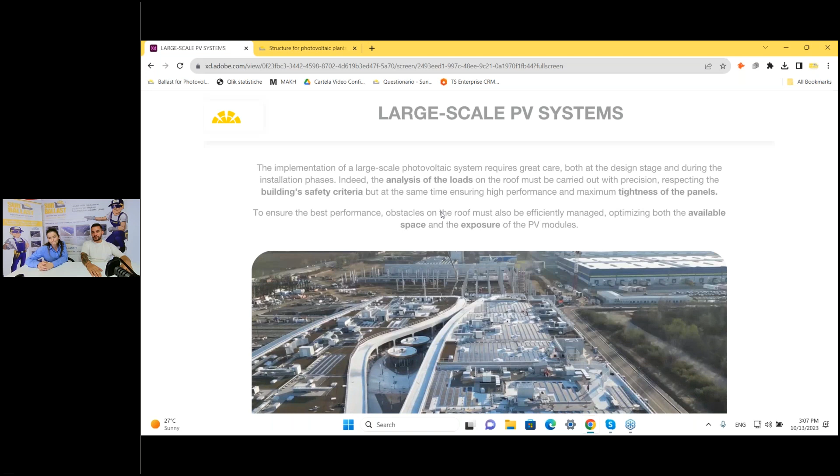Ilona here will explain the importance of installing with Sun Ballast on mainly industrial roofs. Sun Ballast is not only for small installations. Our structure is designed to cover all the industrial areas, right? It's flat roof, but you can use it on different typologies, different types of roofs, and surfaces as well.

As you all know, when we do a large scale PV system, it's very important to take care both in the design phase of the project and the installation phase. There are more experts in the installation plan doing checks and checkups, so it's very important in this phase. It is necessary for all the companies and installers out there, especially with big installations, to know everything regarding the mounting structure, the panel, the company who manufactured it, then the batteries, the inverters, micro inverters — all this goes one by one. So in order for you to sleep well at night, you need to do a very deep check on everything.

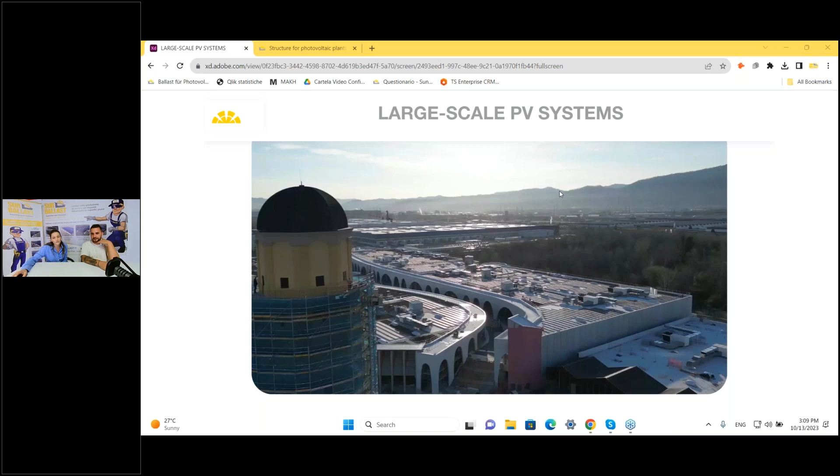Here you can see one of the latest installations done on a commercial roof. It has used one of the systems that we recommend mostly for this type of plant. We will see later on details for which system I'm talking about.

Since we are on a commercial roof, we are talking about large installations. As you know, Sun Ballast has several types of systems. Majority of you have probably used one on your roof, on your installation, with one of their designs. But today we'll discuss mainly two systems that we selected, which are more chosen by our customers for large installations.

The first system that we have is our Connect system. Connect system consists of three types of ballast, starting with the frontal one, which is the lightest, the central ballast, and a terminal ballast, which goes at the end whenever you want to close the panel.

Why did we choose this system specifically for large installations? The advantages of this system align well with all the difficulties we might face on the roof. For example, when we receive a project from a client, we get certain details, which you're going to explain later what we need. Based on the address we get, we suggest the type of inclination and the system. Connect is one of the systems mainly for high wind resistance. So if your installation is located in an area affected by heavy winds, we would definitely suggest the Connect system.

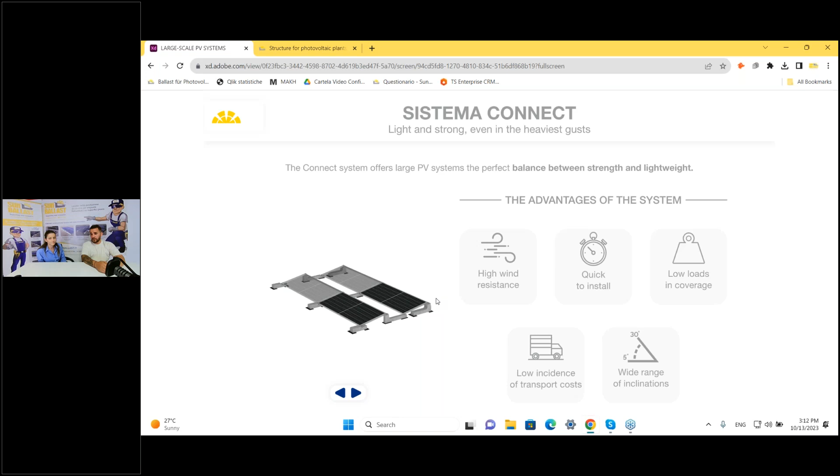Then there are other countries where the sun has more productivity during the whole day, and they don't go for really high inclination. They will go for 5 or 10 degrees, which we already have. Connect is also known for handling the load on the roof.

To recap on inclination, we have a range from 5 to 30 degrees. But that doesn't mean every degree in between is available, no. They are all specified: 5, 10, 15, 20, and 30 degrees. The majority of them are available.

You can install it on horizontal position, which covers 90% of installations. But for areas with very high snow load, we recommend a vertical position, which with Connect we have available at 10 degrees. At 10 degrees you can install vertically all the standard panels that are in the market.

So for those worried about the weight on the roof - maybe they have an old building, or the building was built 30-40 years ago, and the client wants to consider the amount of load on the roof - Connect is one of the systems we suggest more.

So as you know, the weight on the roof with the Connect system maxes out at 25 kilograms per square meter. If we add additional accessories - because even though Connect itself is very wind resistant, sometimes it's required to add additional ballast or weight.

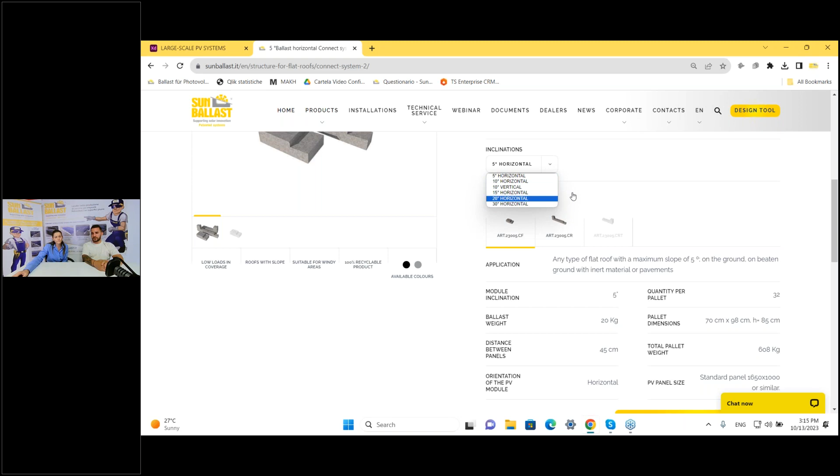So where can they find all this information? If you go to our homepage under products, you choose the systems, go to the Connect system, and you can select the references - this is a part of the references. Here you can choose all the inclinations you want and download them for free.

Based on the inclination you choose, for example, if I select 10-degree ballast Connect system, here you can download the technical data sheet for your system, with all the specifics of the ballast for each of them.

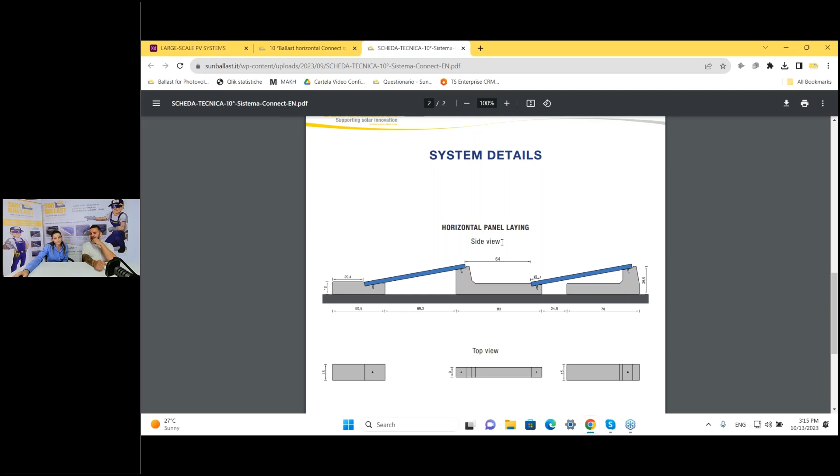So here, for example, for the 10-degree Connect system - the regular 10-degree Connect system has a distance from panel to panel of 64 centimeters. We also have it at 40 centimeters, and at 30 centimeters.

But we could even do custom options. If a specific distance between panels is required, our production team and engineers are able to make a custom ballast with a certain distance for sure. This distance is taken into consideration based on all the relevant information.

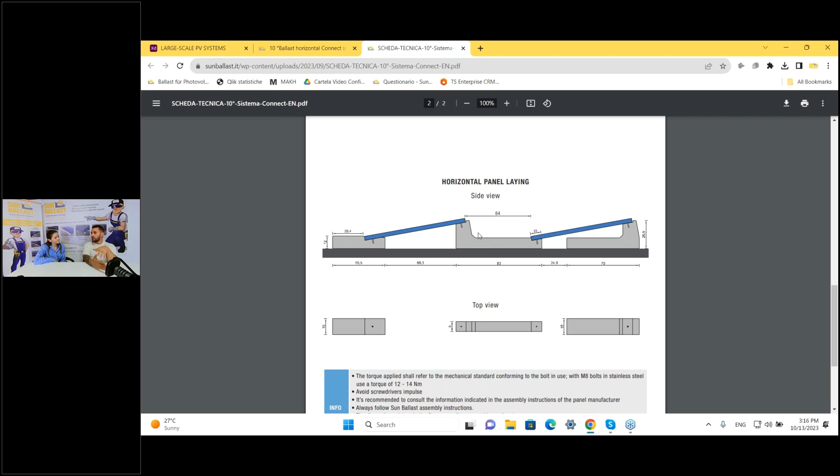Tests are made for all the structures to maintain this distance. For any country, 64 centimeters is more than enough, and it will avoid reducing the productivity of the panel - it will not have shade or anything. There are even countries that prefer to do less, so we can do custom, like Malta for example.

Malta, for example, uses a lot of Connect system, and they are using always - majority of the cases comes with a 30 centimeters distance, right? So for them, it works well. It's funny because in the beginning, when I started having this type of requirement for a small central ballast, our technical team was not suggesting it to us, because of the low distance that they have. But in Malta, this works perfectly. It doesn't create any problem or anything. So why not? Apart from Malta, there are even other countries in the Balkans as well which are using the small ballast, 30 centimeters.

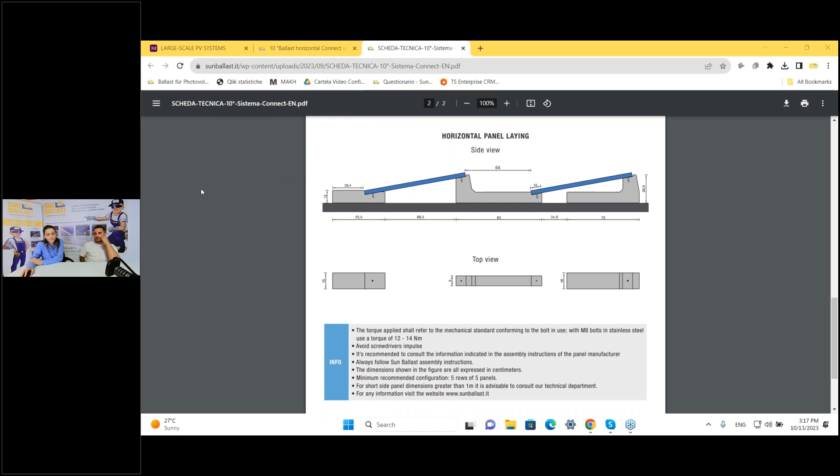Okay, so anytime that you will need a custom solution, for sure our technical office will - yeah, definitely, we come always with different suggestions. Our team is always available to answer your doubts if you have any.

Okay, so I guess to sum up all the advantages of the Connect system: it's a very light system, the weight on the roof doesn't go more than 25 kilo per square meter maximum, so it's not going to be a problem for your roof - even more when it's a commercial roof and you have to go low on loads. It's very quick to install, like all our systems, because it has just a few pieces - you position the ballast, you fix the module with the clamps, and it's done. I think there are some references even here you could show.

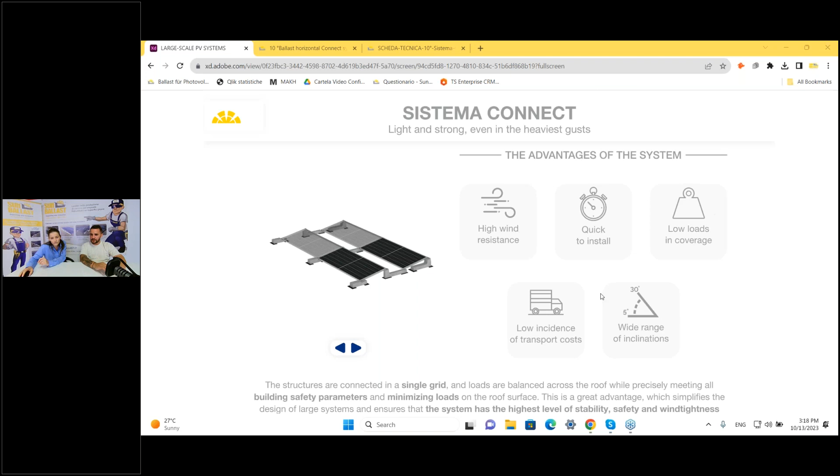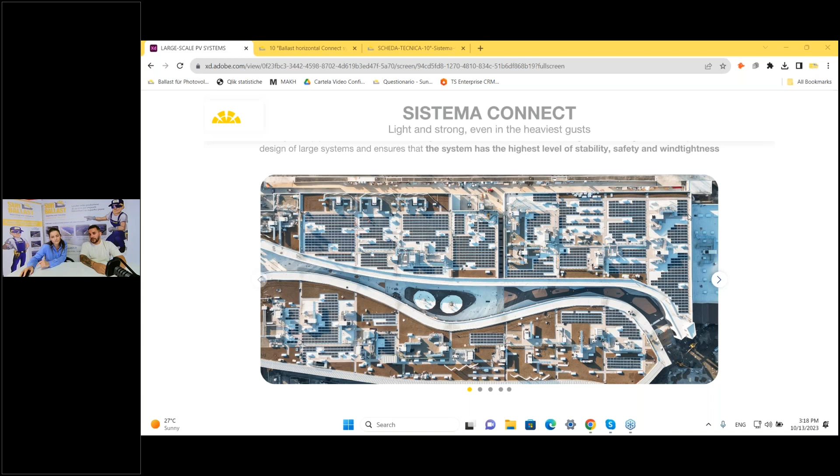Yeah, exactly, here there are some installations done with the Connect system. As you see, even while there are a lot of obstacles on the roof, it's very flexible as well. You can continue with rows, you can add or remove - you can even remove frontals, add more centrals, add terminals if you have obstacles there. So three types of ballast allow you to have more flexibility on the roof.

So this is another system, also on a commercial roof, with the Connect system. Beautiful. Okay, even this one - it's a large system with the Connect system. This one as well, so my favorite one.

Yeah, it's nice - it shows that even near the seaside, which is affected more by heavy winds, the Connect system makes its purpose, right? So it is very resistant. As you were telling us earlier, the Connect system is a very wind resistant system. It's because of the name itself - it's all linked, it's all connected together. So it will not move easily.

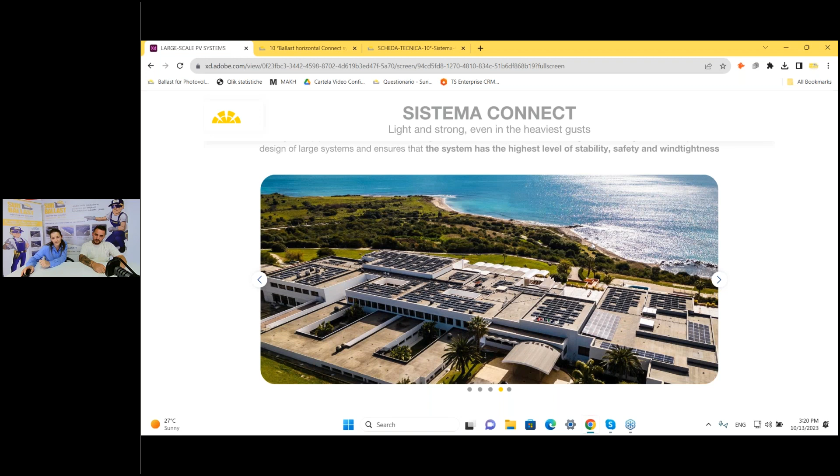Of course, if we're going to have hurricanes and all this, we are here to prepare the reports for you, in order to resist a certain wind speed that you want. But always our technical reports come fully checked, and you can install it easily without worrying that something might happen to the system for sure. True, yeah, especially in this position where the wind is really furious sometimes in the winter.

And I think the other system that we selected for you guys is a large installation. This, as I know, is in Hungary - one of our clients, which decided lately to expand it. Only one part was done in 2021, and then in 2023 was the second part of the roof. As far as I know, this is right.

So I think we should go to the other - why should they choose the Connect system? Because it's a stable system, a very stable system. It has safety, I think it has all the advantages that the installer is looking for out there in the market. It works for a traditional structure, any type of structure that is there on the market - with Connect, you have all of that. It's a racking, it's a weight, it's a counterweight. You don't need to drill, you can just place it straight away. It plays both roles. So why not have all the advantages in one system?

Okay, so before we proceed, we saw some of the advantages of the Connect system. I'd like to ask a question: what difficulties have you encountered in selecting a support system for large plants? Is it lightness, wind resistance, price, installation speed, or other, if you haven't had any other problem? Okay.

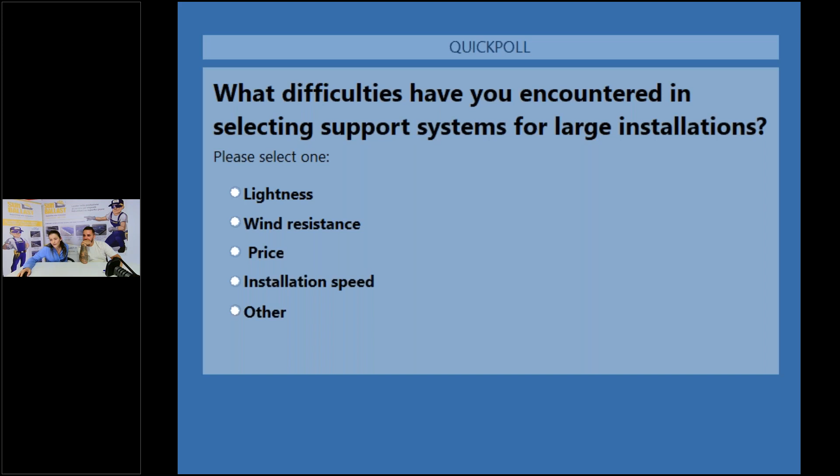Yeah, okay, great. So I see that some of them are saying installation speed, some price for sure, even that it's an issue sometimes. Okay, good.

So I think those who are selecting others, not only price and installation, could even be the type of panel, the dimension of it. So for sure it could be something like that. But obstacles on the roof, probably there's a lot of difficulties out there, right? So yeah, true.

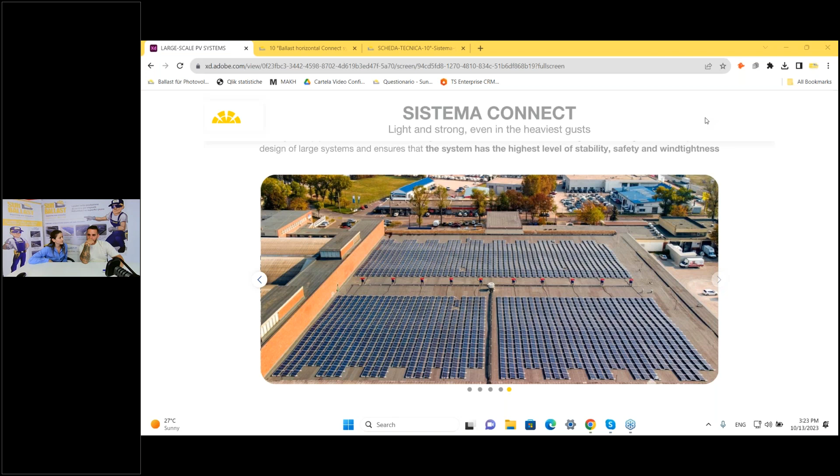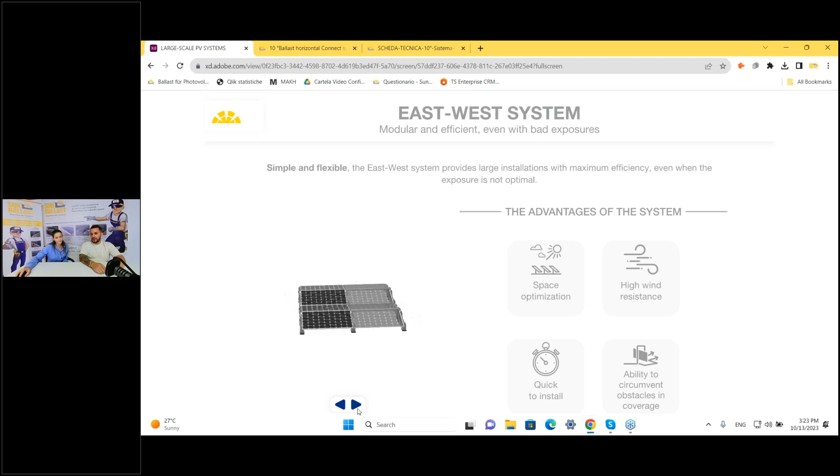Okay, so now I guess we can proceed with the next system that we mostly suggest when it comes to big buildings, big installations. Correct, it's an east-west orientation, of course made with our standard ballast. As we know, even with Sun Ballast, not only with Connect, even with standard ballast, when we started before doing the Connect we were doing just single ballast each, right? And that came also with different inclination. So why not use that type of ballast for east-west orientation?

Pretty much easy, right? So what you have to do during the installation phase is just turn two ballasts back to back, and you could do an east-west orientation for sure, and it's very good for wind exposure. So if you have a building in a really bad location that has another building in front of it blocking the sun, or has trees, this east-west system is something we will suggest for sure.

Yeah, absolutely, so it's nothing more than the single row system, installed back to back. It's simple, easy, the same as all our systems. You don't need to do a lot of things, just carry the ballast on the roof and distribute them, place them back to back, put it on horizontal or vertical poles. You could do it on vertical poles as well, easy. Of course, if the panels are standard with the standard dimension, you could do both sides.

What I would suggest to installers out there is that the east-west system doesn't require a really high inclination. I've never seen an east-west installation with 30 degrees, for example. Probably that's done on farms, I don't know, but east-west orientation maximum inclination they've been selecting with some ballast goes 15 degrees, with 10 degrees being the most common. Of course, there are those who prefer a low inclination of 1 to 5 degrees, according to the specifics they want. The advantages of this system, as we said, are space optimization.

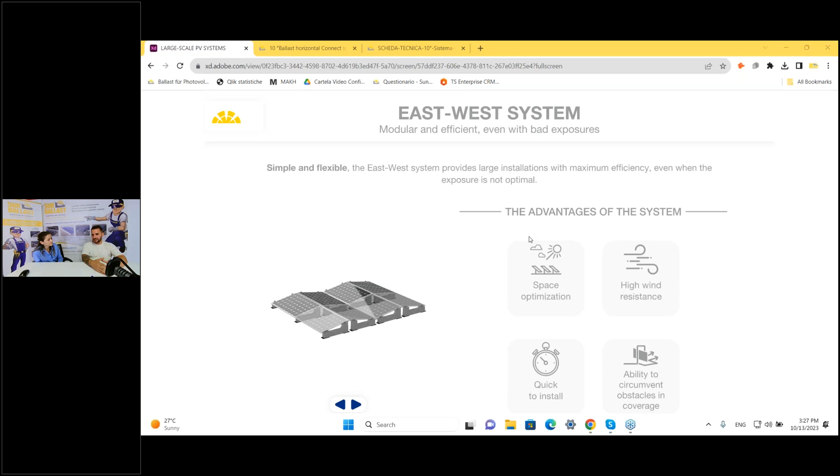The other thing is, of course, very quick to install, like all our systems. Just put it on the orientation that you want, east-west, and then use the clamps which we give in every project, and the rubber mats that go under the ballast. The ability to circumvent any obstacle on coverage is very good because this system is tight, all together without space, but it is flexible — even with this, since it's a standard ballast, you could add or remove.

As you can see on this picture, there are empty spaces where probably there were obstacles, and the client can easily remove the ballast, remove the panel, and place it somewhere else whenever the space is available.

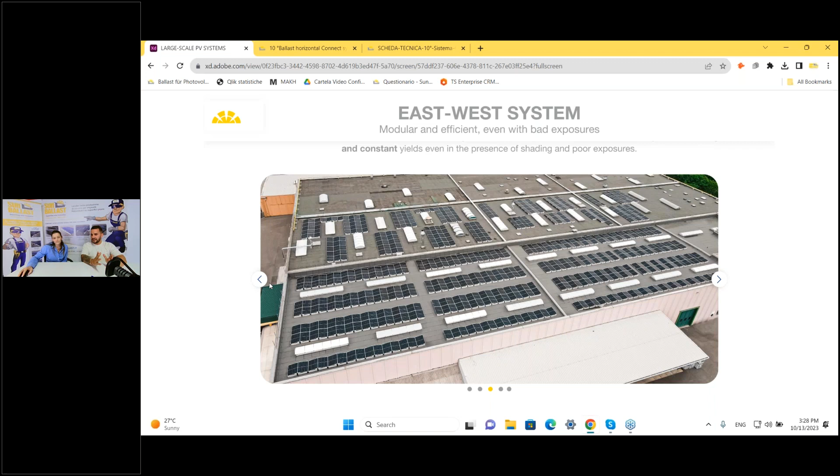As you can see here, there are none. I definitely suggest this type of system. It looks super easy, super clean, as you can see on the roof. You don't see wires, cables, or rails on it. Easy, you just place the ballast on the panel. It almost looks like it's standing on air.

This is something that even when I go to different fairs we attend, whenever I show new installers or new clients who want to become Sun Ballast clients the picture, they say, oh, it looks very neat, it looks very clean.

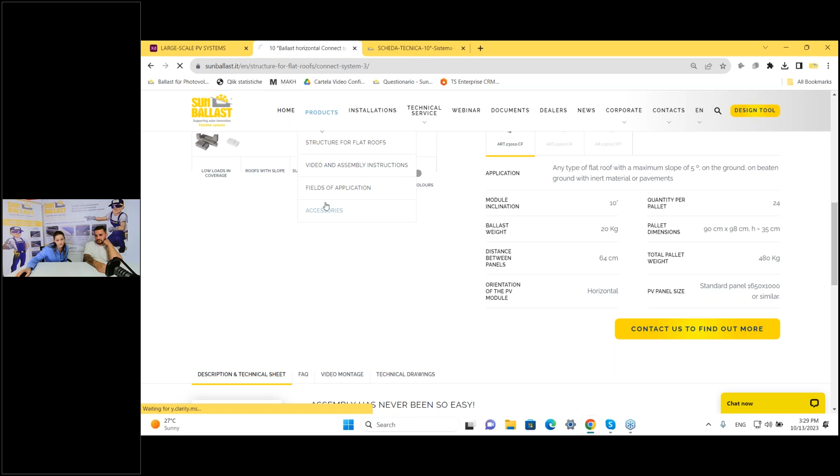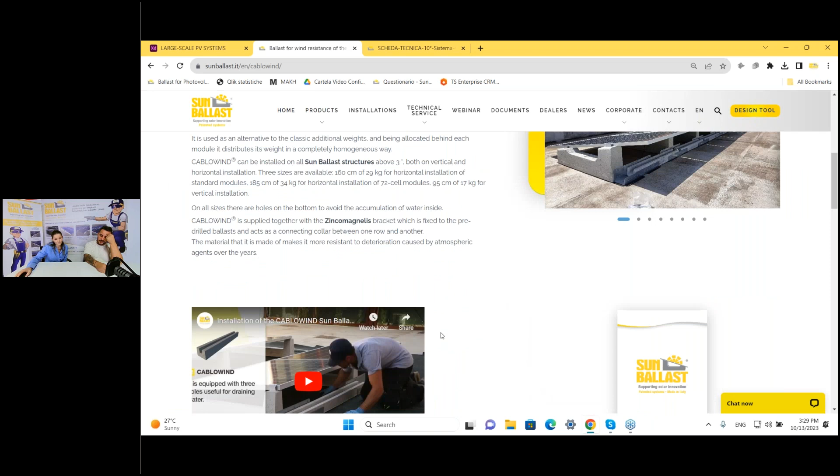In fact, for all those who don't know, even for the cables we came up with a great solution: CABLOWIND. CABLOWIND is one of the accessories which substituted the windbreak. Three years ago, we used to use windbreaks, or windshields, however you call them in your country.

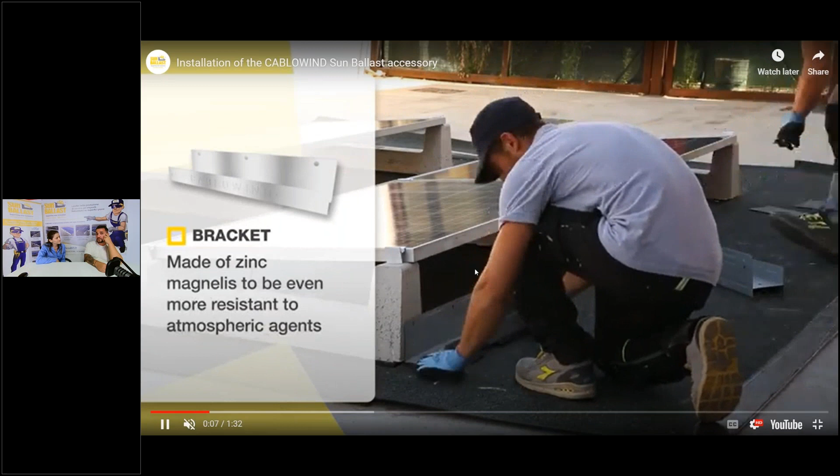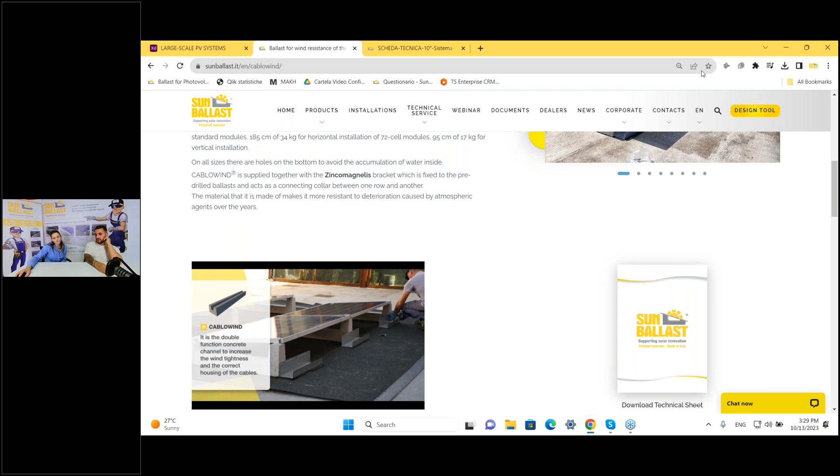We used to have them for specific ballasts only, but due to requests we receive daily from all our agents, majority of them would say that using a windshield would affect the cost of the system, since it requires purchasing something else. So last year, I think at the beginning, was launched the CABLOWIND.

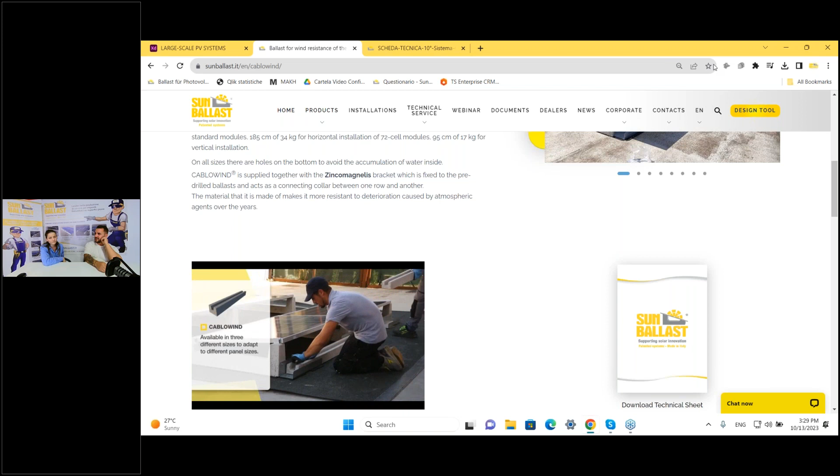Beginning of last year, or end of 2021, we launched CABLOWIND, which, as you can see here on the video Ilona is showing, is a concrete structure as well. It goes on the back of the panel, around the structure, with some brackets where you connect it directly behind the ballast.

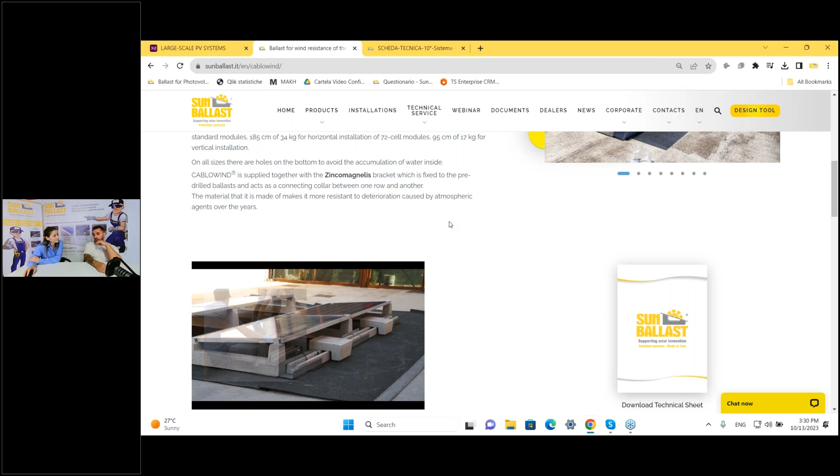As you know, the ballast already has pre-inserted holes, and inside there are bushings, so there's no need for you to drill. There are brackets made of Zincomagnelis material, and all you need to do is place the different concrete blocks that we have for coupling.

They come in three different dimensions, as you see now in the video: 95 centimeters for vertical post, mainly suggested, and 160 and 185 for horizontal post, for large panels, when we're talking about 2 by 1.

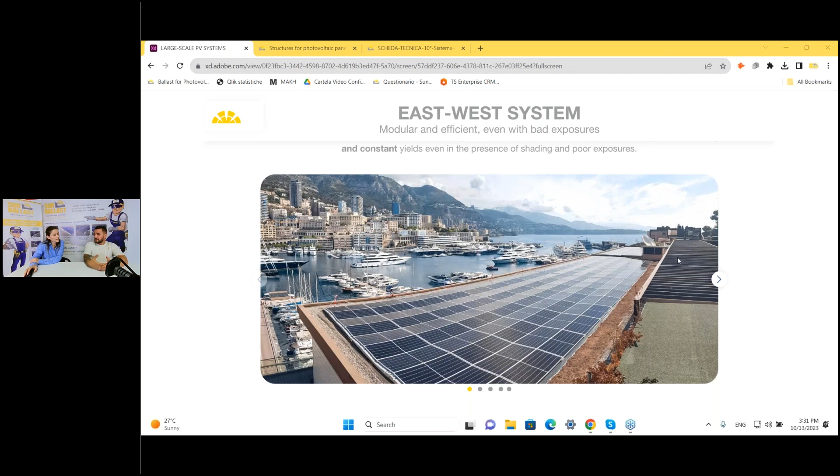But the good news is that for large plants where you use the connect system, in this East-West system, it's not required. Mainly for south oriented, if you use a standard ballast, we might suggest using it. But there are different ways of installing, either with the cable wind, or using a double ballast, or adding an additional weight. There are several types according to the area where it is, and of course according to the price.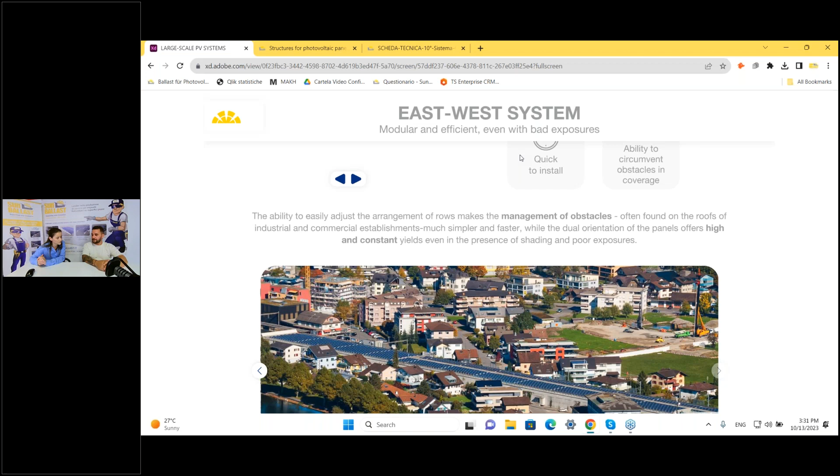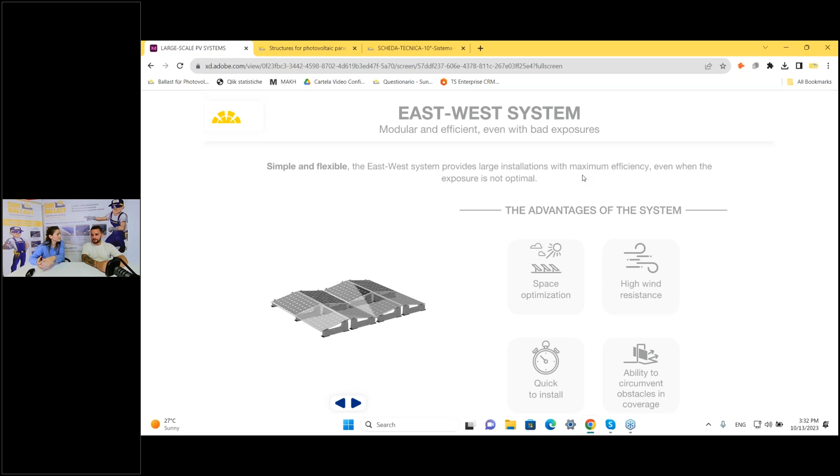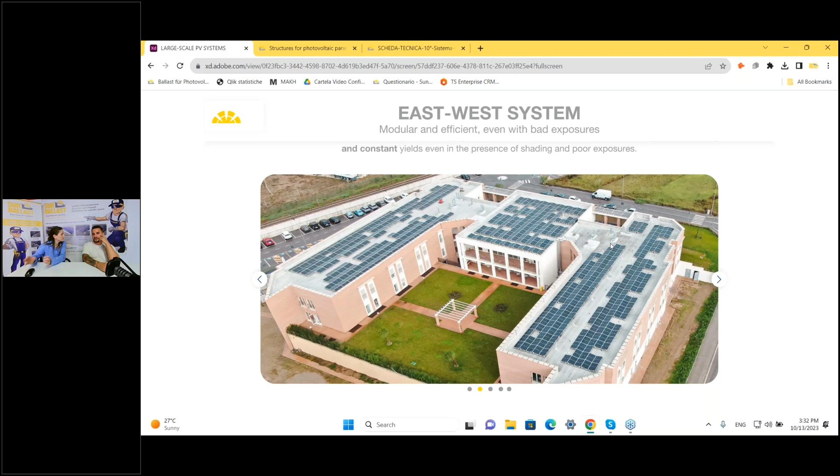So to sum up, the advantages of the East-West system are that, like all our systems, it's very quick to install. It's a great system with the ability to circumvent all obstacles on the roof, as we saw in the picture. Even with a lot of obstacles present, we can remove panels without any problem. It's a very high wind resistance system without needing extra accessories, and it optimizes space because you don't need to leave a distance between rows or between modules.

I think the maximum distance usually required from the client would be up to 1 or 2 centimeters from panel to panel when you do an east-west configuration. So it's nothing at all, you can even join them together. It's no issue. Of course, some installers prefer to leave some space between panels in order to clean the system during summer from dust, or during winter for snow load, so they can go and maintain the system. It's a maintenance issue, so they have to leave that distance.

Okay, so I guess we covered all the advantages of why they should choose this system.

I'm curious to know, for this audience we have, what has been the installation power they've been doing this year. Let me share the question with all of them. What is the average power of the installations you realized this year? We want to see where you guys stand, because a lot of people come to us asking if we have the capacity, if we have this amount of ballast, can we produce it. We have several production sites where we produce big quantities. A project of 500 kilowatts or above will require more than 1,000 units of ballast, which means we have to have the capacity to keep stock, or our distributors need to have it in their warehouses, so we can be there as fast as possible.

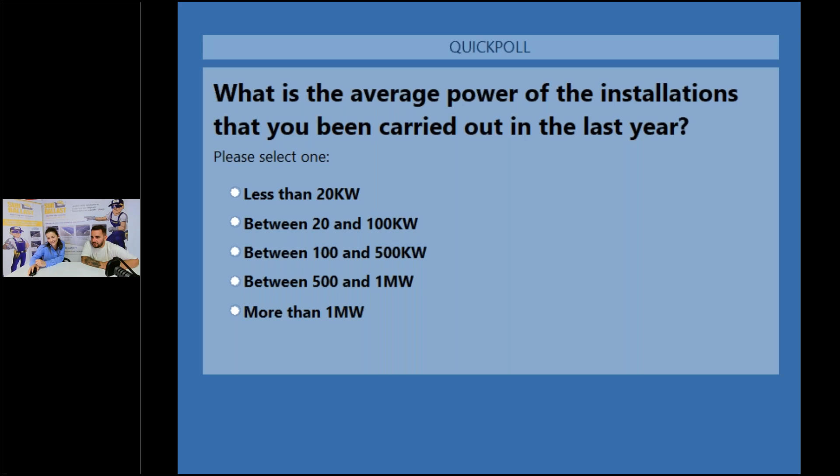A 500 kilowatt installation is quite big, right? Doing it on a commercial roof generates a lot of power. And as Sun Ballast, we definitely suggest these two types of systems, the Connect and the East-West, which we explained.

So to share the results, we are between 20 and 100, between 100 and 500, and between 500 kilowatts and 1 megawatt - these are the results of the survey. I hope we gave you some ideas for this large project. You saw all the advantages of the Connect system and the East-West system, and why you should use these solutions for your large dimension plans.

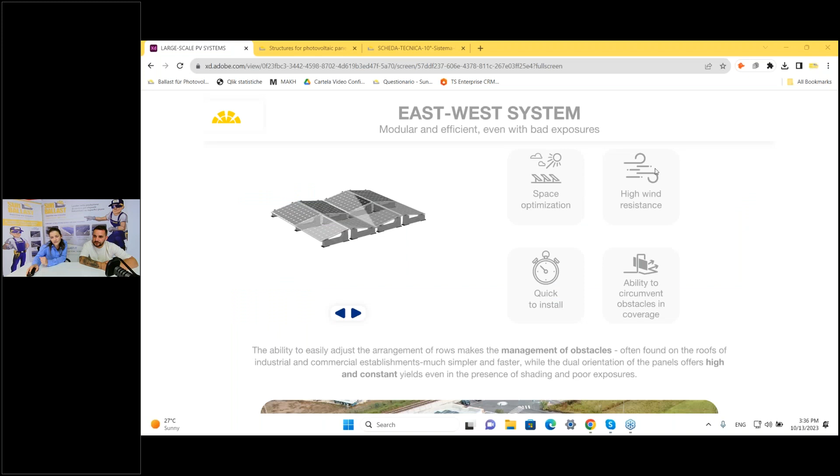Okay, so I guess we can proceed with another solution, that is the NoFlex system. There is no flex system around - it's a system that does not flex the panel, from the name NoFlex, right. So lately, the last couple of months, we launched this - at the event in Munich, Germany, Intersolar, which we all know, we were there launching our new accessory, our system that we like to call NoFlex. From the name itself you can figure out by imagination that it has to do with the panel.

We know that during the last years, we've been seeing panels of different dimensions in the market. I'm surprised whenever I attend any fair to see panels that are like 2.3, 2.4 meters, going 600, even 800 watts a panel - how crazy. And the majority of requests we get now are for large panels, because people want to generate more power with that, and I think it costs less per watt - as a panel it costs more, but you can generate more power from it.

So we had this before, we used to always do double ballast on the panel. But coming up with large panels in the market, our engineering team noticed that there were some issues, maybe from the panel manufacturer, maybe from the structure, or maybe from what was affecting the panel to bend in the center, due to heavy winds or really heavy snow loads. So our engineering team came up with this system, the NoFlex. So what is NoFlex itself?

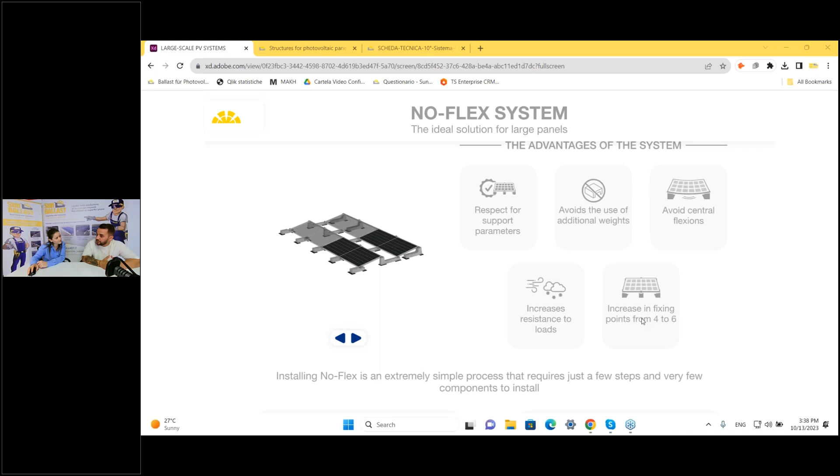NoFlex is a system that allows you to add a central ballast into your panel. So if you imagine having a Connect system like we have here, what you need to do is just add another central ballast in the center of it. But how do you connect it? So when we were doing the tests on it, we came up with these junction plates.

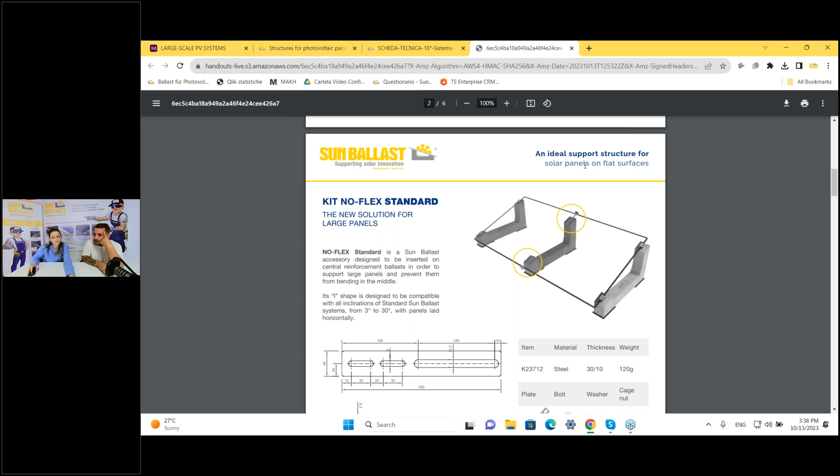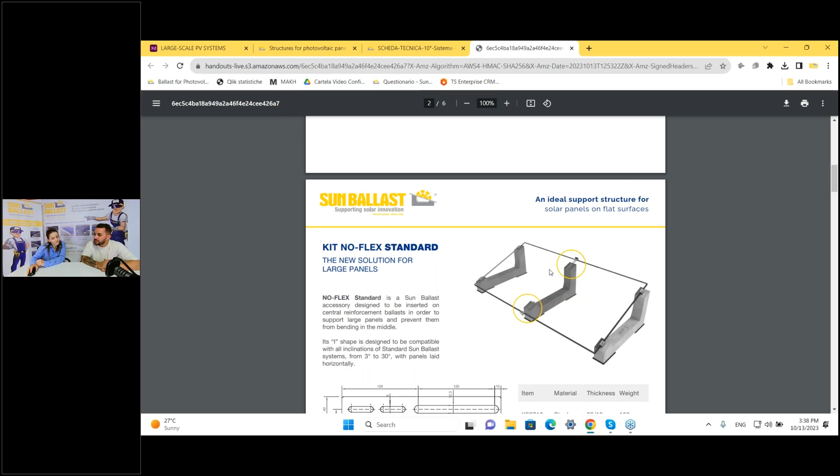These plates we provide allow the panel to be clamped not only from the short side, which in the majority of cases from installation manuals we receive is where they clamp. From the long side, since it's a ballast, it was short to grab all the panel from the long side. These two junction plates were added on each ballast. There is a picture showing this plate, which is different from the Connect system and different from the standard system.

For the standard system, we have the I-shape bracket that comes as a kit with a screw, washer, and cage nut. For all those who don't know our systems well, the standard system is the single row. You use an I bracket with the screw, washer, and cage nut.

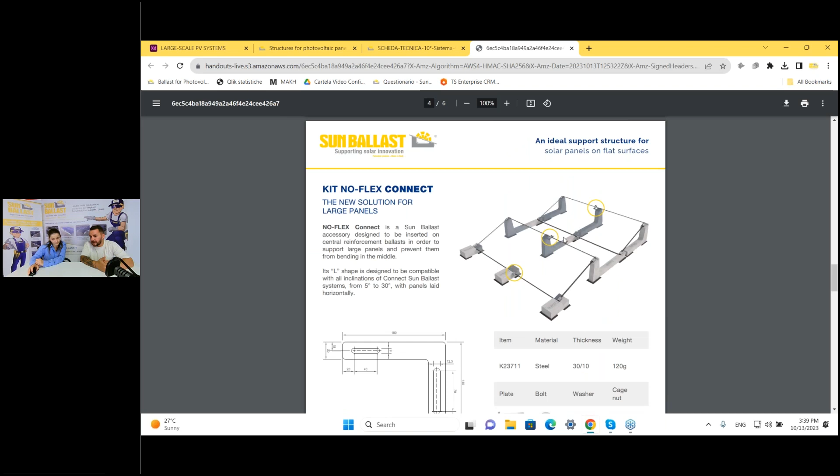But for the Connect system, it's still a bracket, just has the shape of an L. It has the L shape because the Connect system has teeth on it, on top and on the bottom. As you can see here is the standard, but in the Connect system, the L shape is placed on all the ballast. This will allow you to clamp the panel on the long side of it.

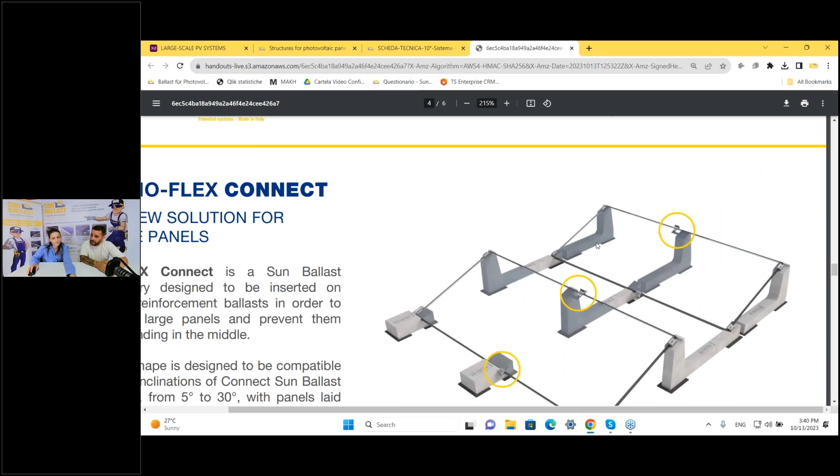Of course, tests are being made of it. We will never launch something if it's not licensed, if it's not patented with us. So we've done several tests with the NoFlex system, because people might wonder what would be the average force of pressure on the panel if it goes in there. When we did this test, everything came up a success, and the panel would resist longer.

Of course we always check with the panel manufacturers to see where the fixing points are. That's why sometimes, before NoFlex, we were requesting the installation manuals in case the panel wouldn't be clamped from the short side.

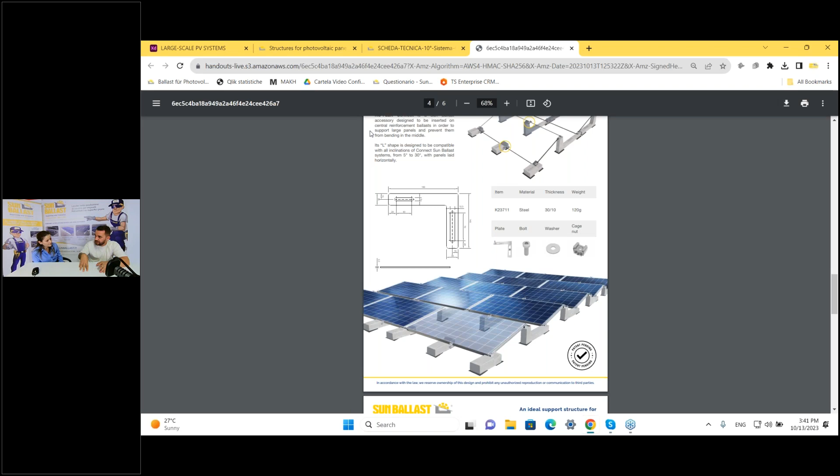So having a NoFlex system with those brackets allows you to connect it not on 4 points, but on 6 now. That means your panel will be more resistant, will last longer, will not tend to bend in the center, and you'll be very safe. Even with heavy snow loads, even with heavy winds, you'll be totally cool with it. So there will not be any issue.

To strengthen what you said, the role of the support structure is precisely to support the module. So we try to support it in the best way possible without damaging the module, like avoiding the central flexions and so on.

I need to point out that this system, we came up with because of large panels, and we wanted to come with something that was unique. And I have to say it had a really nice success.

You might say that an additional ballast is added, so that will increase the cost. Yes, that will increase the cost, but as with ballast, the bigger quantity, the more discount you get. So the prices will be more or less the same, and you'll be more safe.

Regarding the weight of the roof, with Connect we still do the calculation even with NoFlex, and they go up to 32 kilograms per square meter with Connect. It will avoid everything, so you don't need to add any more additional 30 kilograms of weight. You will not need to add double ballast, nothing. We have it in your central ballast.

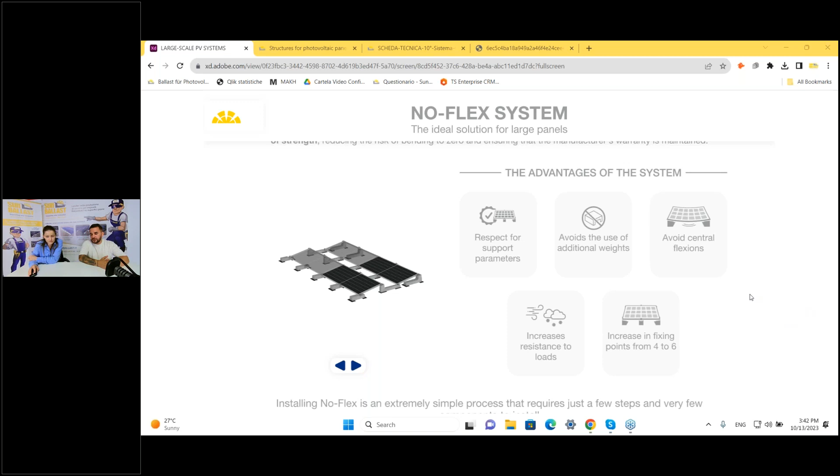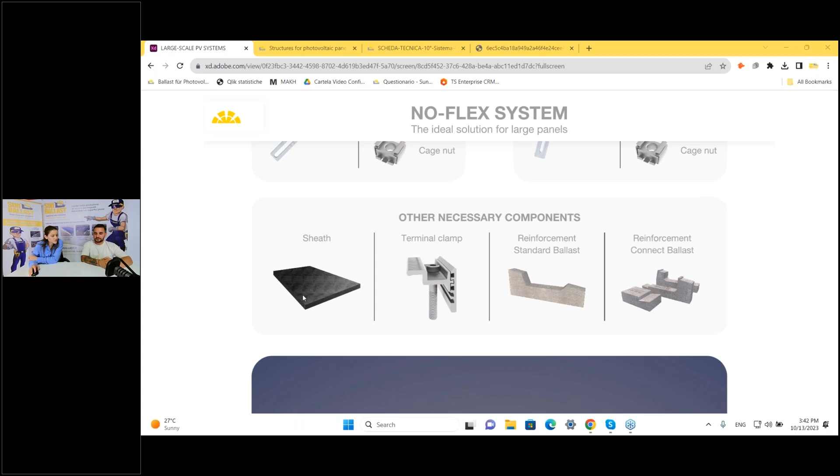And of course, you can use it on horizontal panels, which is available at the moment. So it's very easy, just like all our systems. You position the sheath on the roof, you position the ballast, the system that you are installing, like the Connect system, for example.

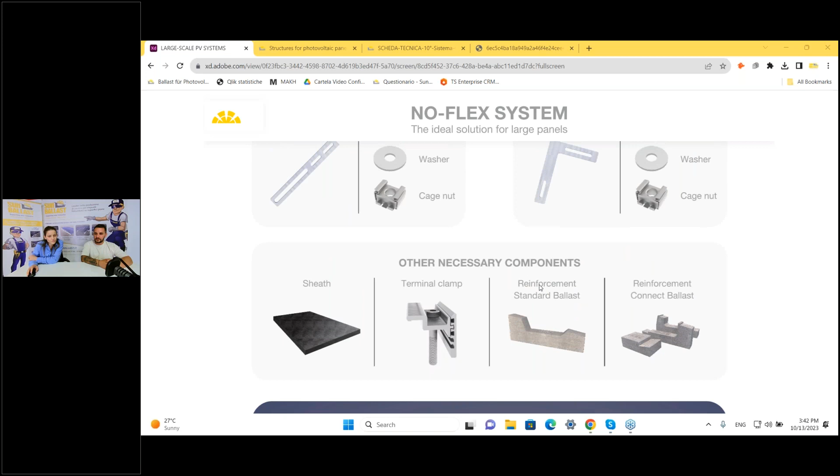Then you just position the reinforcement standard. There will be added just 2 more sheaths, 2 clamps, 2 terminal clamps, in the center, and the ballast, of course.

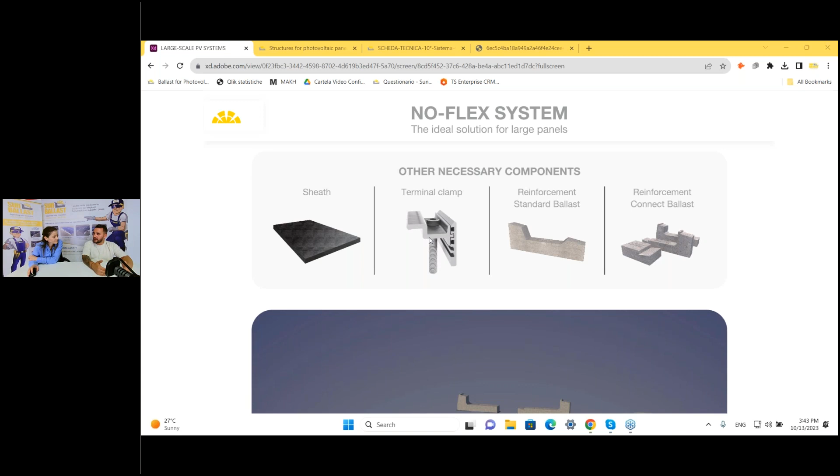Then you just need to fix the module with the clamps. Correct, we have the anchoring point. We know, whenever we have a model, from the technical data of the panel we see where it needs to be anchored, where it needs to be clamped. So in fact, the installers there need to verify that before giving out a technical report to them.

True, I'm just trying to find the video, the installation video, so I can show some.

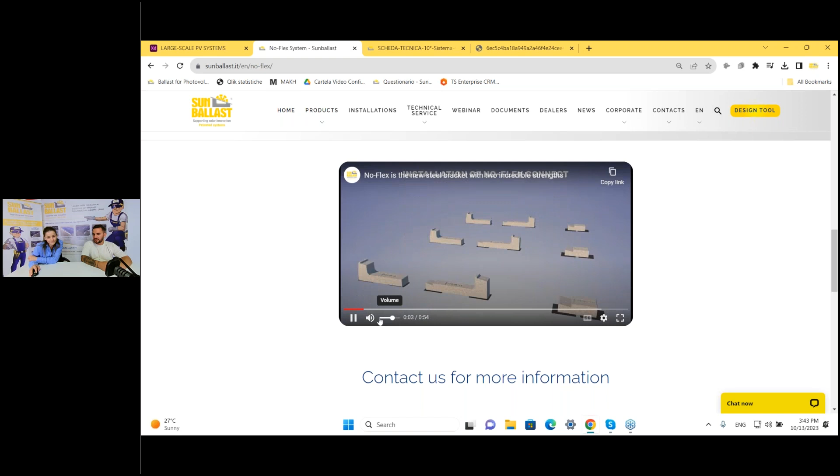Okay, here. There's an instruction video where it shows you how easy it is to install it even with NoFlex. Firstly, the Connect system, adding the central ballast here, the accessory, the brackets. You just position the module here, and it's done.

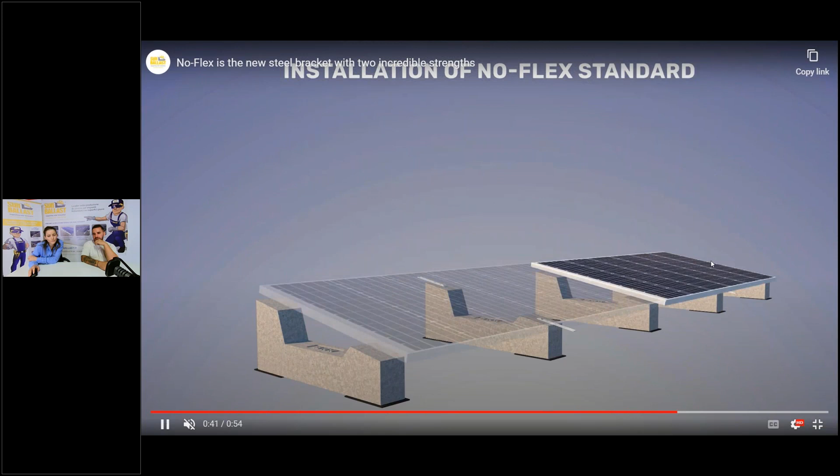It's the very same thing with the standard system. As we mentioned, now we can see with the standard: firstly the ballast, then the reinforced central ballast, the I-shape NoFlex bracket, the module, and you just fix the module with the clamps, and it's done. That's all, it's very easy, everybody could do that.

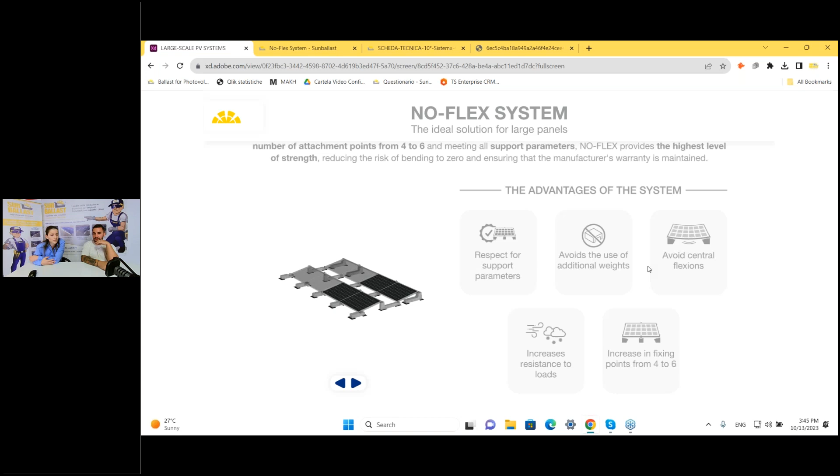I guess we showed even the NoFlex system. So to sum up, the NoFlex system is a great solution when you have large modules and you want to avoid the central flexing, the bending of the module. You have to respect the support parameters of the module. It's also a very good system because you don't need extra accessories like U-shape weights. And having the central ballast increases the fixing points from 4 to 6, so it's a great solution when you have large panels. Yeah, I think that's regarding the NoFlex.

But one interesting case is when there are small obstacles, like things below the structure, the aluminum frame can be modified. To read it all, even for those watching the webinar, all above applies, but one interesting topic is when there are small obstacles like aerators or piping that can be put below the structure, and the aluminum frame can be modified.

Ballast-based only cannot. Tommaso, if you can be more specific on it, because I need to know if you're talking about obstacles which are under the roof, or obstacles which are shown outside on the roof, because we have different types of ballast and they come with different heights. There is a ballast that could be 40 centimeters above, so there are ballasts which are high enough that they could go over the obstacle you have, and you don't need to move the system at all.

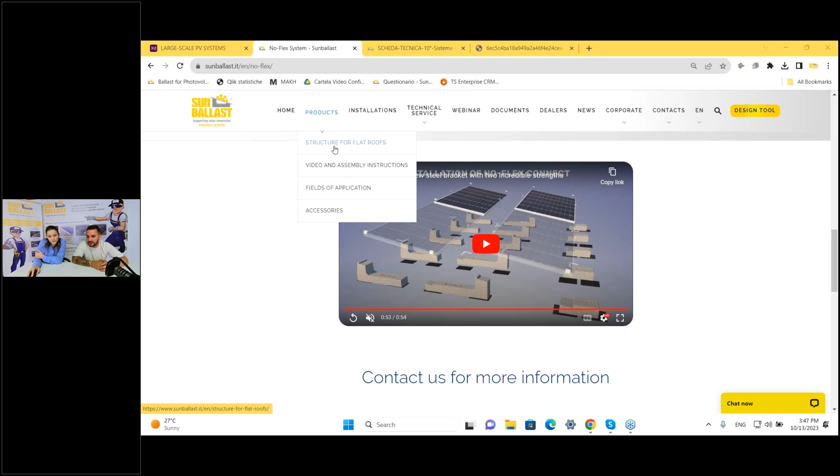So if that answers your question, yes, we do have several types of ballast, but so he probably asked the question when we hadn't specified that the system is very flexible. So all our systems are very flexible. Okay, but...

Let's wait, there's a 'but' as always. There are trays, pipes, and stuff that sometimes are in the position where the ballast would be, and you cannot skip the ballast. Yeah, that's true, and there's nothing you can do about it. With our system you cannot avoid it - if they are in there, how can you place the ballast?

So anyway, it can be interrupted. If they don't want that, that's why Tommaso is mentioning that with a traditional structure you can, because you raise it up, you don't touch it. But with the ballast, of course, you have a specific area which you need to cover, and there's not much you can do about it, or as Ilona said, you can just leave the space and go another way. But we get your point now.

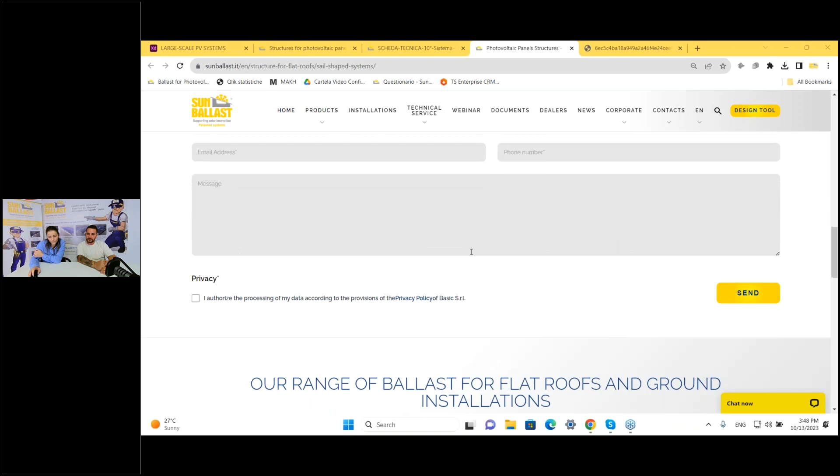So that's the problem. All right, we got that. Okay, anyway, there are even cases, as you were explaining Errol, where for example there are obstacles and we have higher ballast, like the sail system. Okay, let me get you the technical data sheet.

Yeah, that's just in order if you want to cover an obstacle, right? So that does not implement what Tommaso was saying. But this is something that could be useful for you, Tommaso, in case you have an obstacle that you want to place a panel in there, but you can't.

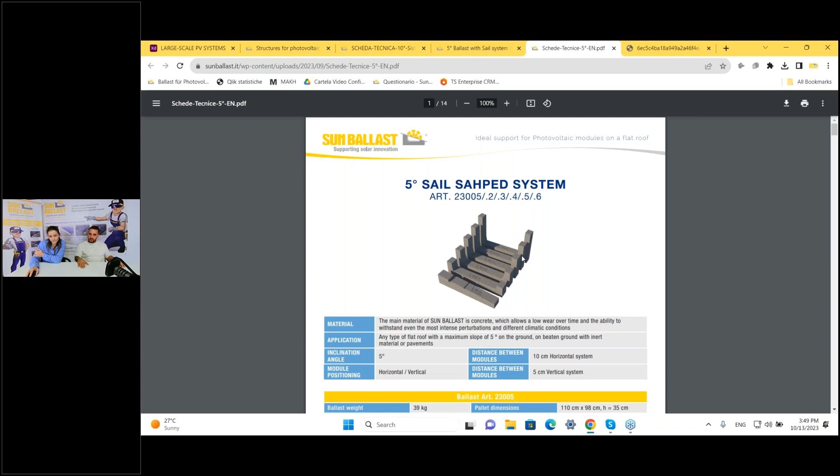But with some ballast, the height... Ilona will open now. You will see that the height of it is different, and you can place the panel on top of it, and the obstacle will remain there.

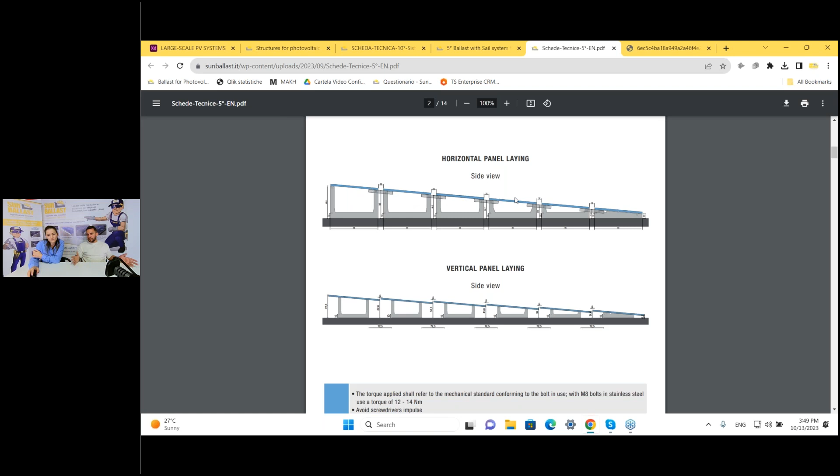True. So if you have in the middle of the roof a higher obstacle, you could try this, because this type of system Ilona is showing, you can purchase it as a whole system, or as singular ballast from the highest to the lowest one. We have it on 5 degrees and on 10 degrees. And of course, it helps you a lot.

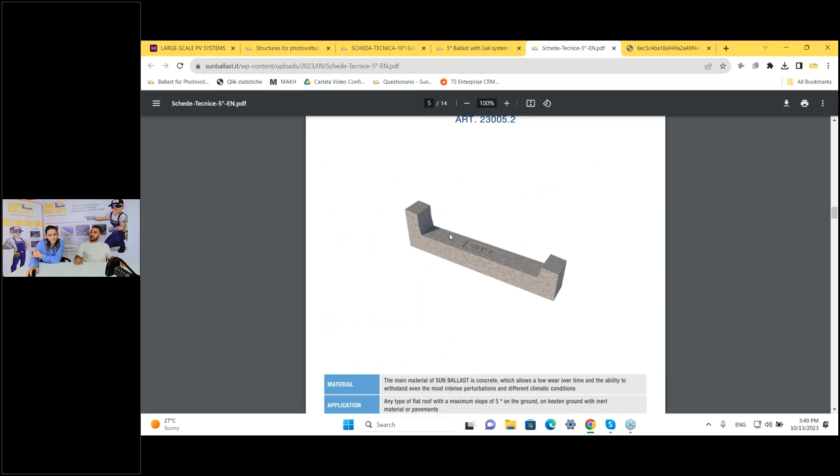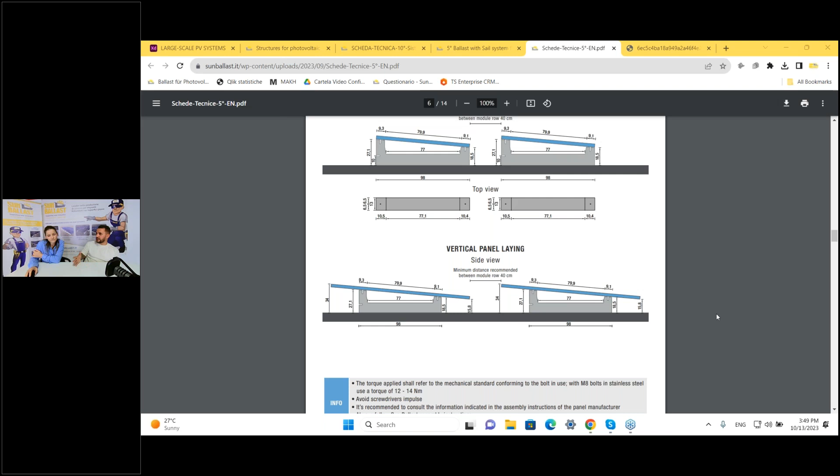I remember one installation where the client had plenty of obstacles on the roof, really small ones, and he said our ballast was too low. He wanted a 10-degree installation, but 10 degrees wasn't high enough. So I suggested the 11.3, which we have, and that type of ballast did the work for him.

So all the obstacles that were on the roof, he moved the ballast in a way that was not touching the obstacle, but he covered it with the panel. So you cover even the obstacles that are not affected, because there are obstacles that need to be free and can't be covered, and there are obstacles that don't have any problem whether they're covered or not.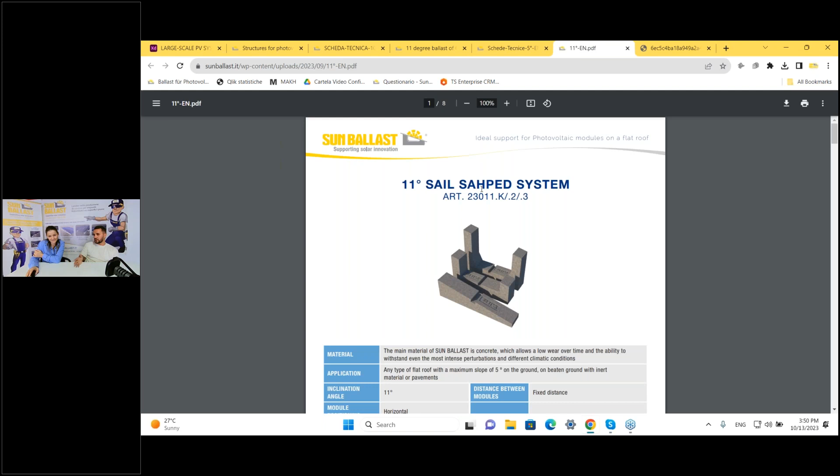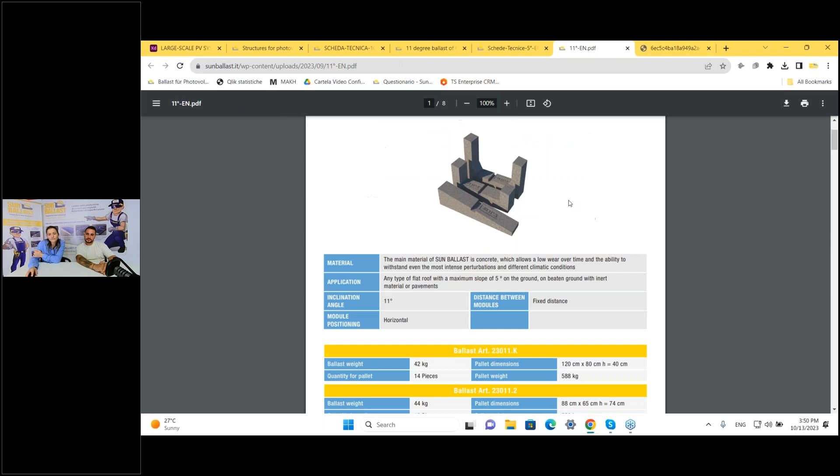As I told you, the sail-shaped system comes in two inclinations: 5 degrees, which goes up to 6 rows, and 11 degrees, which goes up to 3 rows. So these systems you can get as even systems or even as a single row system, that's not a problem. But for example, when there are obstacles that you're allowed to cover, you can absolutely use this system.

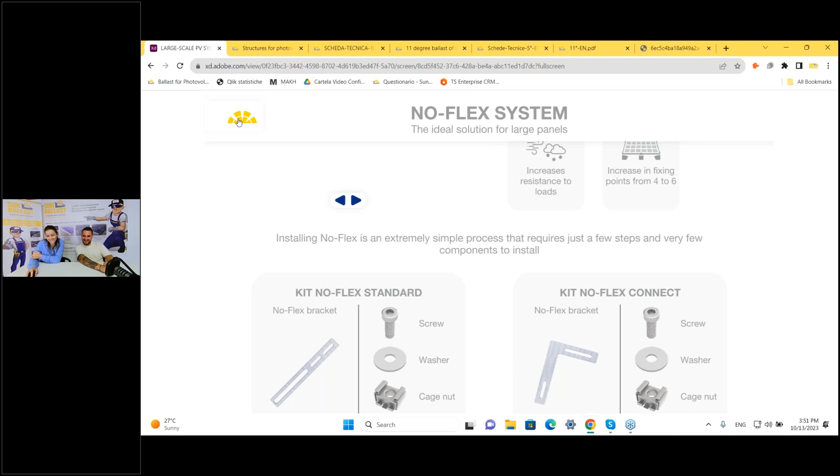Okay, then I guess we explained even the no-flex. For you, Thomas, I would suggest for your question, I think all you need to do is break the ballast in two, leave a bit of space for the obstacles, and then put the panel in it. No, the technical office, I don't think approves that. Okay. So, okay, he said it's gonna be done.

Okay, so I think we should talk a bit about the technical part, right? What do we receive, whenever we get a request from customers, how our technical office works.

To explain to all of you that probably haven't asked for an offer from Sun Ballast yet, we have a technical office, a full department of research and development as well. We are always doing new solutions based on market trends, like the last one we explained, the no-flex system. The technical office has almost 20 designers and architects who do projects every day, and they've seen every case possible on a roof.

Correct, so they can give you the best solution based on the plant data. There are cases where clients ask why we need all this data. It's very necessary to have a specific technical report on you, with all the details. They are mandatory for us to receive this data from you.

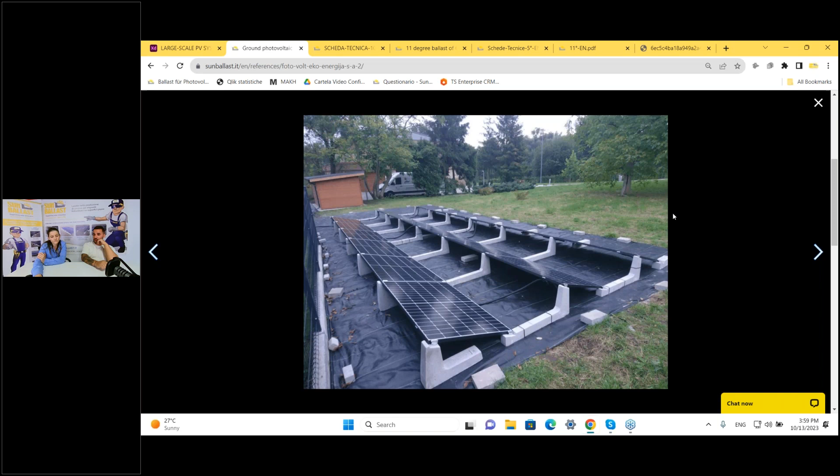If they are flat, you could use it on the ground as well. In fact, we have a lot of ground installations realized with our system that I can show you right now. In ground, people think it's ballasted, it moves, and you cannot use it. We've done several installations on the ground with a lot of our distributors who've been choosing to use the ballast on the ground. So of course our technical team and our agent will always help you tell you if you could use it or no.

How do they do that? The first question they ask is, is the ground completely flat? If it's not, you cannot use it. We'll not push it to put the ballast on it because it's not stable. If it's completely flat, or if it's not, we'll tell you to adjust it.

Some of them could put gravel into it. Some could cover with concrete. Some could use fabric material as we see on the picture, and those types of advice help you do an installation on the ground, even a small installation, but even a large one. There are occasions we've done in several countries installation, not just a small sample, but we've done installations over 500 kilowatts, over a megawatt, that are done on the ground. The client decided to use it on the ground.

Using the ground with a concrete structure compared with a traditional structure where you need to drill to do the checks in the ground, financially wise, is cheaper than using that way, way cheaper. In fact, there are even cases where they are not allowed to drill.

A lot of cases they want a ballasted structure, not only by us. I mean, there are other companies out there too, but the question that came to us was, am I allowed to drill? They told us, I'm allowed to drill only 50 centimeters. There's some type of material under the ground which is not allowed to drill. So when the client has something that requires direct impact with the ground, our structure is compatible with it. Of course, we suggest it.

I saw a question going through. In fact, it was precisely about the surface typology, which is the inclination, the maximum inclination, the slope of the roof that we can use ballast on. So going from flat roofs at 0 degrees, we go up to 5 degrees slope with a ballasted structure. There are different occasions where the roofs could have a slope of 6, 7, 8 degrees, something like that. Of course we need to know that. First of all, we need to know if there is a slope bigger than 5 degrees, and whether we could still do an installation.

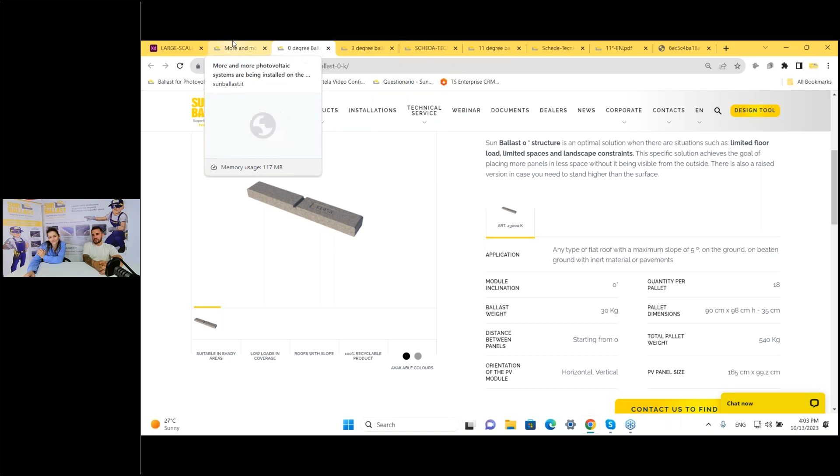Another necessary piece of information in order to prepare the technical report is the module inclination. Yes, of course, it's something that we need to ask. We have over 60 typologies of ballast, different ones, 35 types of inclinations, and we definitely need to know what inclination you want to do. This is something we do ask because the majority of requests come with a chosen inclination already decided by their client or by their engineers.

We definitely need to know, because with that we can suggest you the right inclination according to the area you are in, so you don't use 5 degrees in an area where it's better to use 10 degrees, for example. Or if you want to do a ground installation, we will always suggest using a higher inclination, going to 20 or 30 degrees slope.

So there are cases where the client tells us the inclination, and cases that leave it to us, and we suggest it to them. We've been in the market for quite a while, and we know the areas, what is sold more in each area, in each country, what ballast is sold more, and what type of inclination.

Okay, great. And based on that information, we get the best solution for the problem. Correct. So the other two things that the plan is showing now are the height of the building and the height of the parapet.

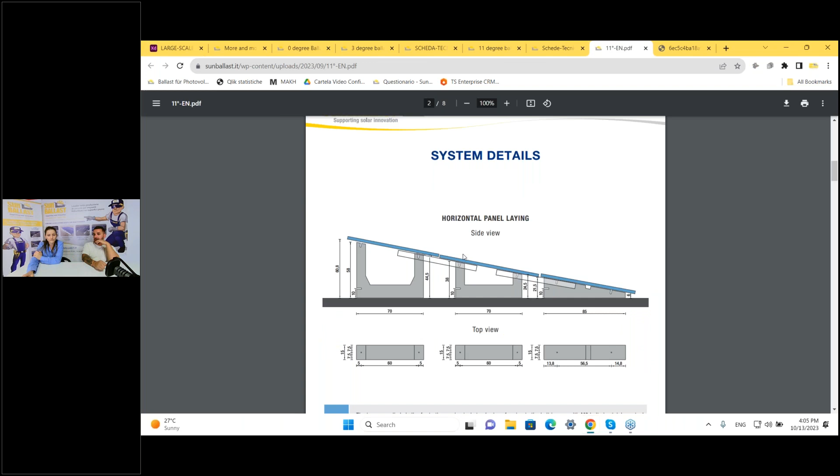So for that, as we spoke before, with the 5 degree issue, high ballast is suggestible for roofs that have a high parapet. So you could use the high ballast in order to prevent the shading.

So to sum up, these are all necessary information in order to prepare a full technical report. Yes, with all these details, we'll provide you a full customized technical report with wind mentioned in there, with a load on the roof, a BOM, a design of the roof.

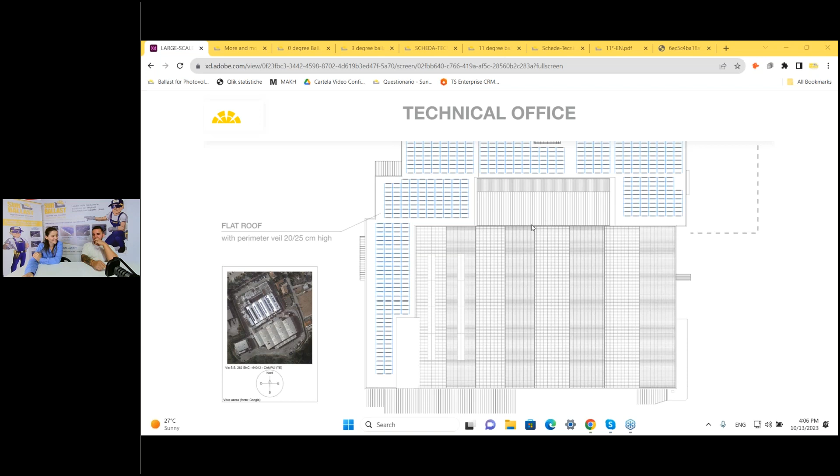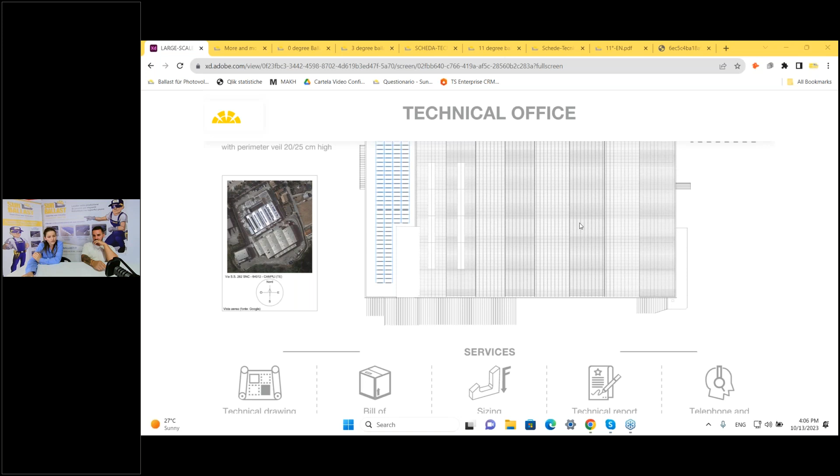This is a drawing which Elona, I'm sure, will explain a bit later, done with our configurator, our design tool. So what do we get after the client has provided all the necessary information that we talked about and explained earlier? They get the technical drawing, that is this drawing here.

They get the bill of materials. Yes, so all the BOM in there, all the listed ballast and accessories that are required for you to do the installation. They get the sizing calculation.

You get all the details of the ballast, the height, the width, the number that comes in a pallet, the weight of it. So it's very necessary, not only for your roof, but even if you wanted to arrange transport, whenever we send it to you, or if you want to pick it up from your distributor or from us or whoever you want to buy it from.

They also get a technical report signed by a qualified technician if they need it. Correct. Like all our technical reports, they are checked and verified by our engineers. And we have several types of reports to mention.

I mentioned before that if we get a simple request like 'I want 10 panels installed,' we could do a simple, approximate report for you. Nothing confirmed, but this is the BOM that you need to install 10 panels on the roof. Then there are the other technical reports which we offer with Elona and with all.

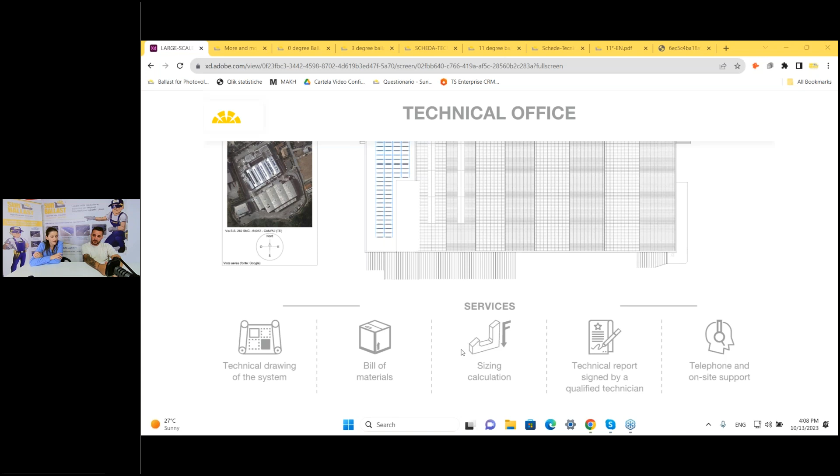Okay, and above all, we also always offered phone and on-site support. Telephone support from all our agents in several languages: German, English, French, Spanish, and Italian as well.

So that's what you get whenever you provide us these details we mentioned above. You're gonna get all these details, and you will not be worried about installing it on the roof or selling it to your client. You will have all this provided from us. If you have questions or doubts, you could call us on the phone, by mail, all this. I'll leave our contact details so they can contact us if they have any further questions.

I was going through questions. I see another one: can you use two systems on the same roof? Yes, definitely. It doesn't have to be just one system — you can use Connect in one of the areas where south orientation is suitable. Probably you have another, higher building at the back, so we'd suggest using an east-west configuration there.

So you can do a mix of both systems, not only Connect and east-west but even with others we have out there. Yes, definitely you can do that. I see another question about the weight with the Connect system. We mentioned, right, maximum goes up to 25 kilograms per square meter, but in the majority of cases it goes to 20 or 23. If we are required to add additional accessories, it goes up to 25.

Great, okay. I don't see any more questions at the moment. I think we answered all of them.

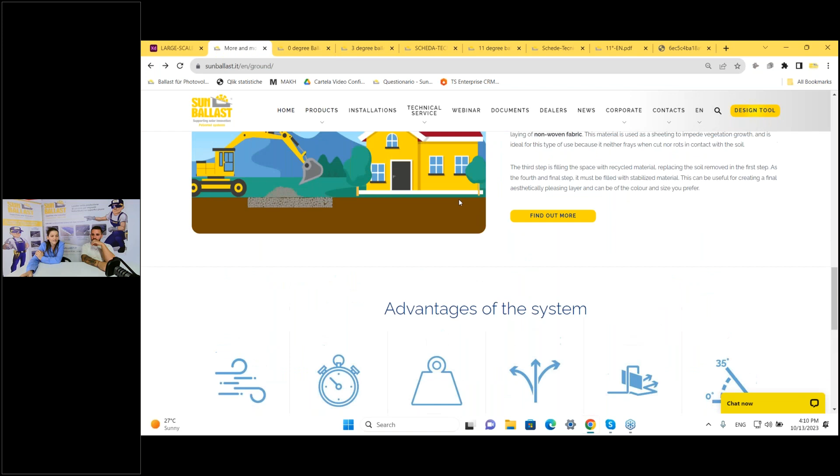Anyway, if you still have any questions or doubts about the system, I'll leave our contact details here. You have our phone number, our email address, and even our website you can consult. As you saw, I told you everything — I gave you the data sheet and the installation video just using the website. So if you go to our website, you'll find everything. We even have a chat on our website, so anytime you can't find something, just write to us and we'll answer you shortly.

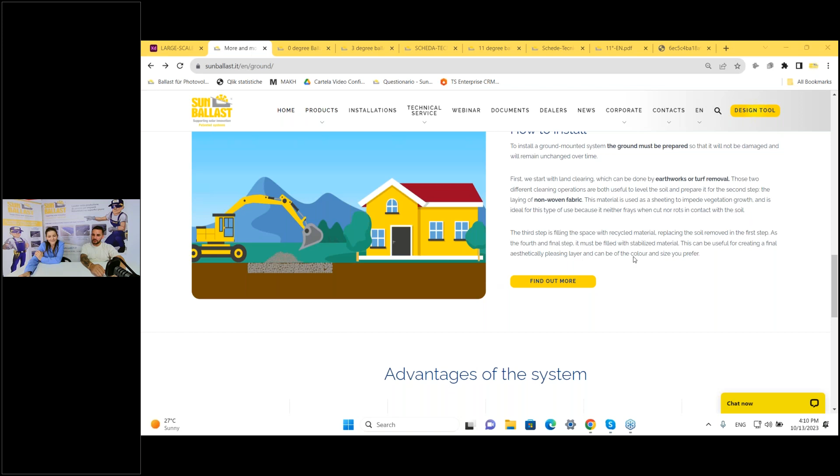Okay, I hope this webinar was helpful and that you learned something new about the system. I know some of you already know how to install it — we know it's very simple. With Sun Ballast, we've been saying in all the webinars that there aren't a lot of steps you need to follow to install it. But for those of you who are here for the first time, I hope you learned something new.